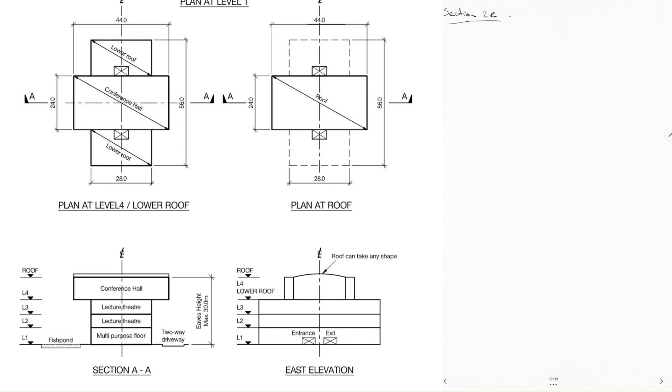Today I will be going through the method statement section of the 2023 February exam for the IStructE. The first and most important thing, in my opinion, in this section is to make sure that you do not spend too much time in this section, because the marks that you get for this section are not so much for the overall score of the exam.

So if we start with the preliminary works and mobilization, I think it's important to mention at the beginning that you need to develop a site waste management plan. And because of the emphasis that has been given lately to the importance of reducing carbon, probably also mention developing the site waste recycling and management plan, for example. So it's important to mention in the beginning, and even more important, I think, to also mention it at the end of the method statement.

Then after you have mentioned the preliminary works and mobilization, you start with the groundworks and foundations. Following the groundworks and foundation, you go to the superstructure. One important note is that the template I was using for this method statement shows different lines that are applicable to different structures. I use that template to get the basis of the method statement, and then I start adding on top of those basic things the important things that are more related to this structure.

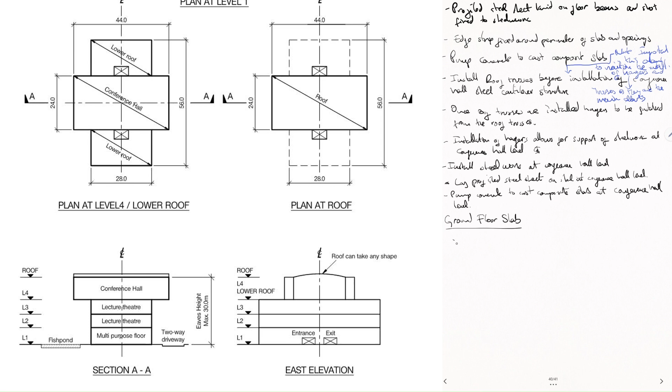After I talk about the superstructure, then I tend to talk about the ground floor slab. And the reason is because, to put the ground floor slab to correct specifications and quality, most of the time you need a surface to cover the ground floor slab from the elements. So that's the reason why I put it at this stage.

Another thing that I added specifically for this project is the facade fitting out. Always add the section facade fitting out, but then make it more specific to the type of building or the type of cladding they're using in the building. In this case, for example, you have a combination of brickwork and glazing. So I mention the brickwork, but I also mention the glazing afterwards, because at the ground level, I believe there was a 70% area that was going to be glazed.

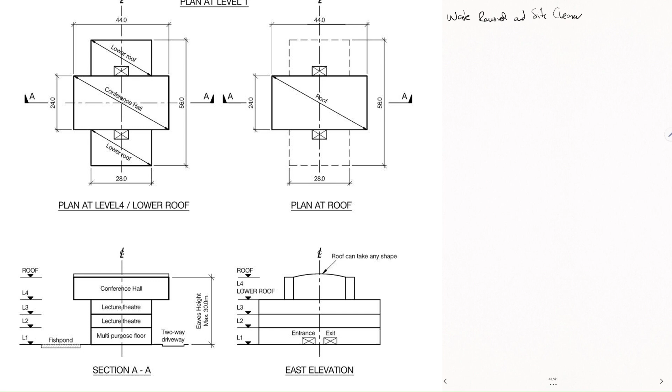And the final section of the method statement is the waste removal and the site clearance. Now, as I mentioned before, it's very important to refer to the waste management system that you put in the beginning of your method statement, and it will be valued positively by whoever is reviewing your exam if you take into account the recycling or reuse of materials. So just mention that once you're clearing the site, you follow the recycling or reusing procedures that are established in the waste management or clearance management of the building.

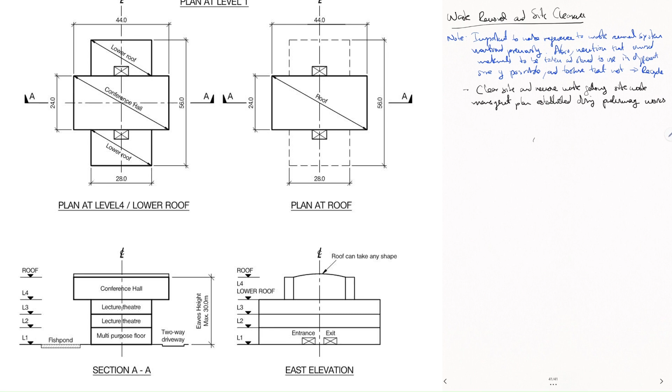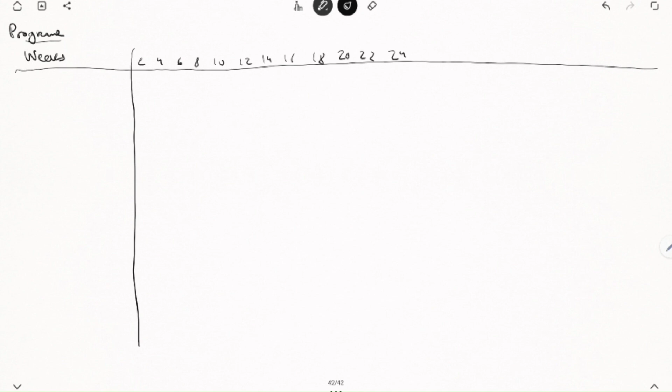Now, in this exam, because it's from 2023, we had to do a program, which basically is an approximate Gantt chart with how long you expect the project will take. I believe now in 2024 and 2025, the exam will not require you to do a program, but because it was an exam in 2023, I completed this section.

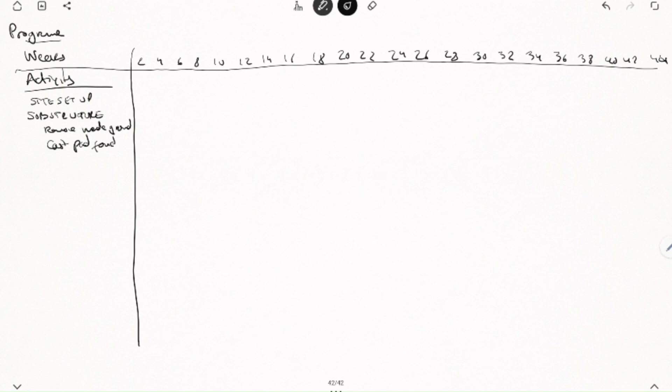I start by adding the activities on the left, and then a number of weeks, normally about 42 or 52, basically almost a year or just under a year. That's more or less what I have found this type of project in the exam tends to last. If you think it's going to take longer, of course, make it longer.

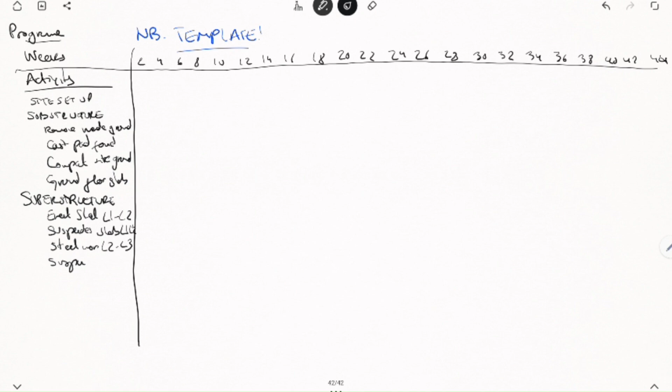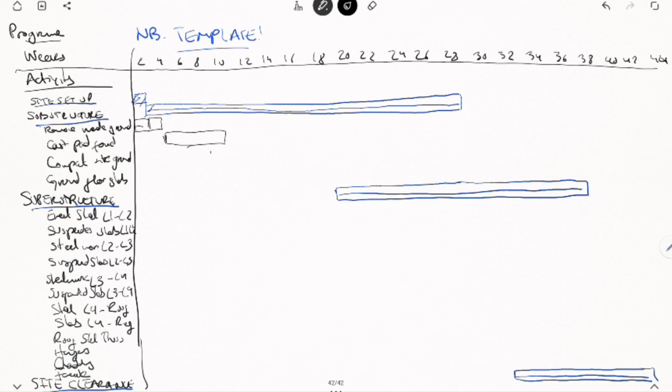So in the activities, I then create subsections, which are first the site setup, then the substructure, then the superstructure, and finally the site clearance. It basically follows more or less the same pattern or the same subtitles as the method statement. Now I start drawing the length of each subsection first. In this case, I just took the length that I had from one of the templates and I drew it there.

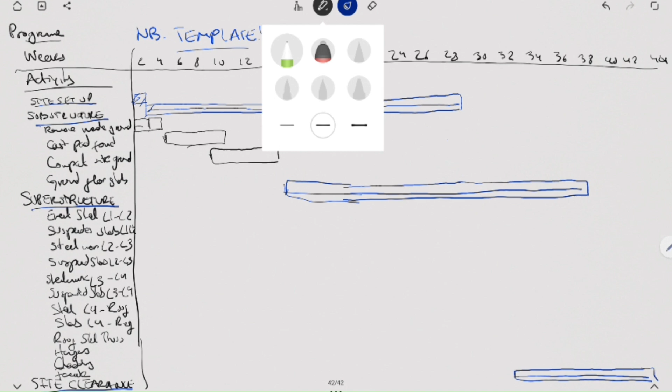Then I start to fill each activity with the number of weeks that I think it will take. And depending on that, I will then modify the overall length of the subsection. For example, here, after I put the ground floor slab, I noticed the substructure is not going to take as long as I thought it would originally.

And that's the end of this section and the final video for the exam 2023 February. So I hope all these videos for the 2023 February exam have been useful.